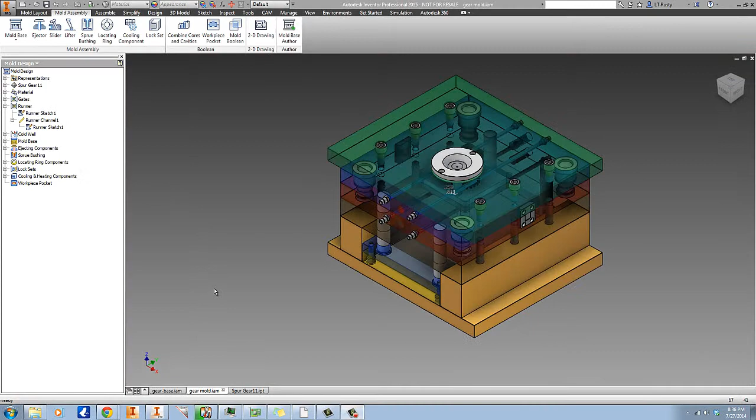Okay, final step here, which is simulation. Click back over here to the mold layout tab. You can see over here on the right we've got mold simulation.

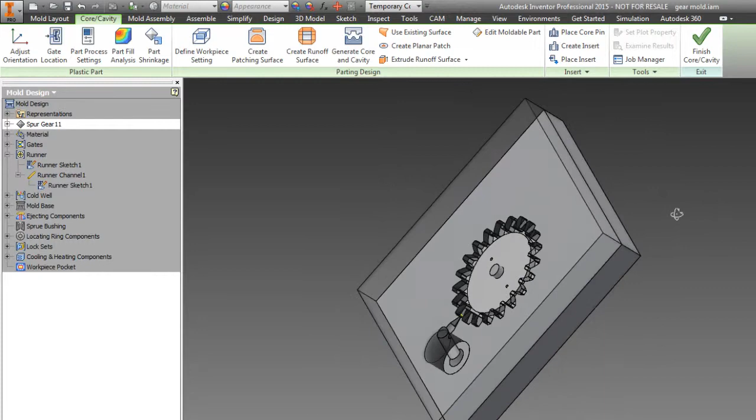Now you may have noticed when we were in the core and cavity section earlier you could do part fill analysis. Well, part fill analysis is cool, but it doesn't give you really complete results. It doesn't take into account the shape of your gate, the shape of your runners, sprue, anything. All it looks at is strictly just one point for your gate.

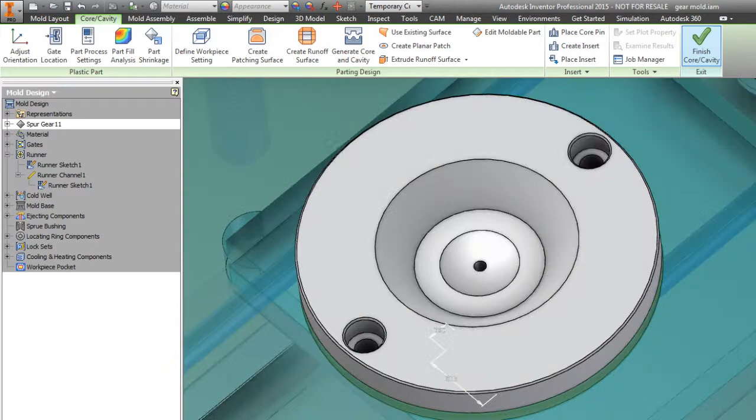And then just the part shape. Now you can use it to get some quick information and just a general rough idea of whether or not your part is going to perform the way you want. But I do run it a lot before I go to all the trouble of making the whole mold.

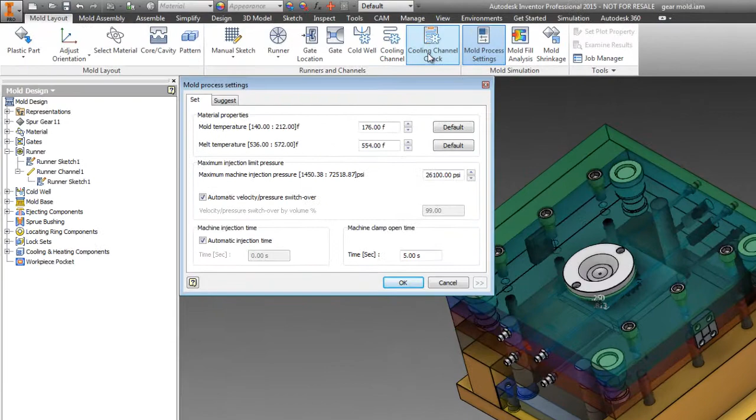But this one is a much better simulation. Now it is worth noting that this is a very stripped down version of Autodesk Simulation MoldFlow that's built into Inventor Pro.

It's not going to give you all of the same information, and it's certainly not going to give you the same information density that you'll get out of Sim MoldFlow. But it also doesn't cost $80,000, so there's certain trade-offs that you have to make there.

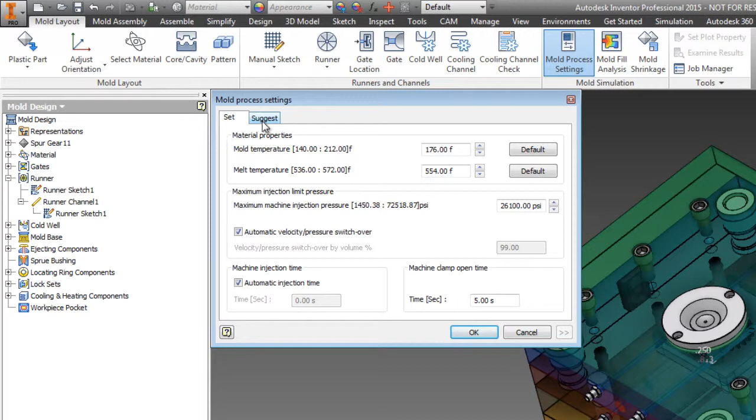Start off with mold process settings. We'll click on that, and I'm going to go ahead and click on the Suggest tab because I can throw numbers in here all day long, but Inventor will figure out a good starting baseline to work from for determining your process settings.

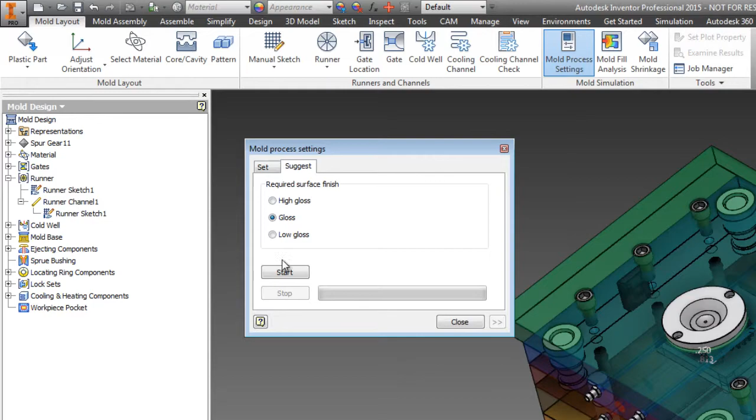And we can pick from 3 different types of finish here. Now, being a gear, this is probably not a cosmetic part, since we didn't try to make it fancy. This is probably just going to be an internal piece. So low gloss is going to be okay for the surface finish. And I'm going to go ahead and click Start here.

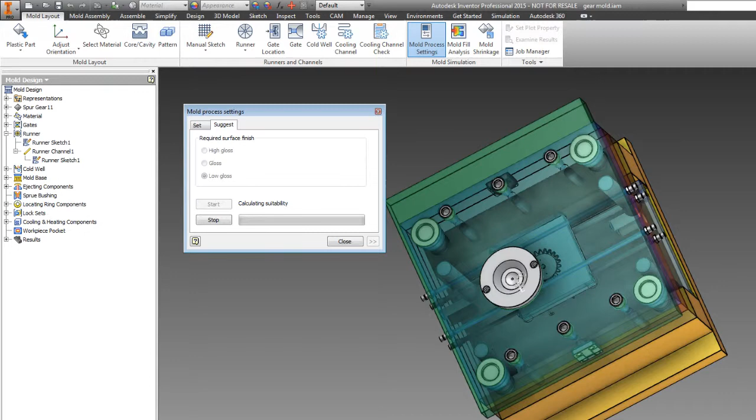And I'm going to actually pause the video once the simulation is running, because you don't want to sit here and wait. So pause. Alright, and we're back. That took about 3 or 4 minutes in the end. The actual analysis was quick, but everything leading up to it took some time.

So it automatically brings up this window, which is kind of a summary of the results. And using this particular material that we used, which is a 6/6 nylon, 33% glass fill, it recommends that we start off with a mold temperature of 180 degrees, a melt temperature of 556 degrees, and yes, this is all in Fahrenheit.

I still don't think in metric. For me, degrees are always going to be Fahrenheit. Injection time will be 0.75 seconds.

Now you notice over here it shows us the little 7 for the recycling, and that's of course other plastics, which your recycling centers all hate. It says environmental impact is only 3 out of 5, so less energy to mold this than some.

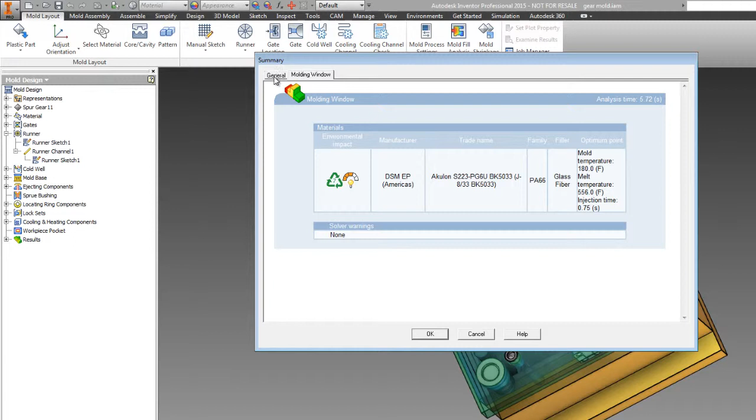And you click over here to the General tab, and it says, okay, the imported model is thick and chunky and appropriate for 3D analysis.

Analysis resolution is just going to be default. We're not going to do a real high density analysis here. The max machine injection pressure that this is going to need is going to be somewhere around 26,107 for the injection pressure, sorry. So we'll go ahead and hit OK.

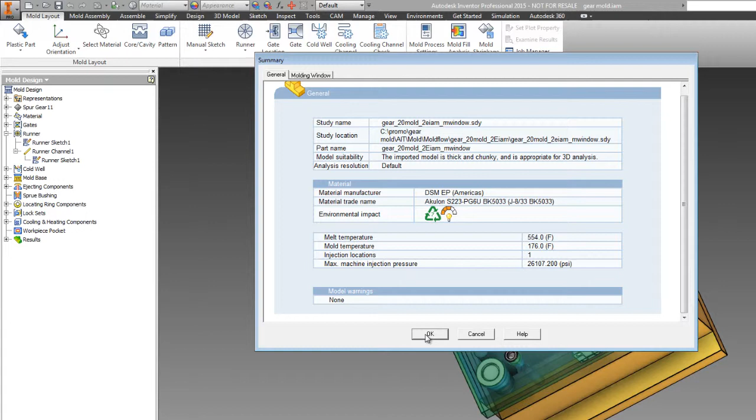And now when we click back on mold process settings, you'll see that the recommended settings have been carried over in here. So we'll hit OK again.

We'll hit mold, actually before we do that, and check on mold shrinkage here. Now, of course, shrinkage is really an extremely esoteric art.

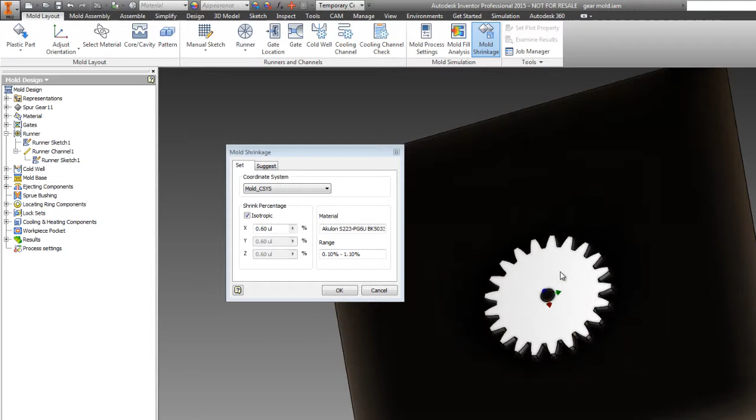Manufacturers don't like to publish real accurate shrinkage numbers. They'll give you kind of a range because they don't want you to hold them to it if there's a slight formulation change or anything. So in this case, for this Akulon, the range is 0.1% to 1.1% shrinkage, and Inventor kind of takes a median on that of 0.6%.

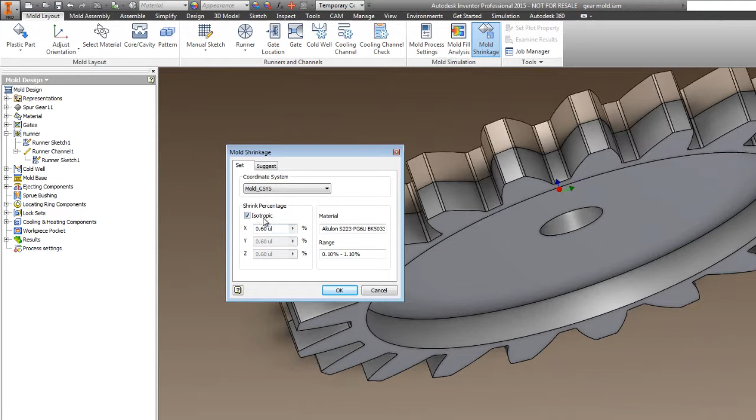If we uncheck isotropic here, then we can specify our own shrinkage in all 3 dimensions. And Inventor again can give us an estimated, a suggested shrinkage to use, based on end of fill pressure or absolute pressure or whatever. But I'm gonna just stick with the default isotropic 0.6%.

So, oh, no, I wanted to cancel that and not edit it. So, okay, mold fill analysis. Go ahead and hit that, and we're going to hit start again. And then again, I'm going to pause because this will take a few minutes. It won't take very long, but I've got an i7 4770K and 16 gigs of RAM, and this will still take a good solid couple of minutes to run. So, pause.

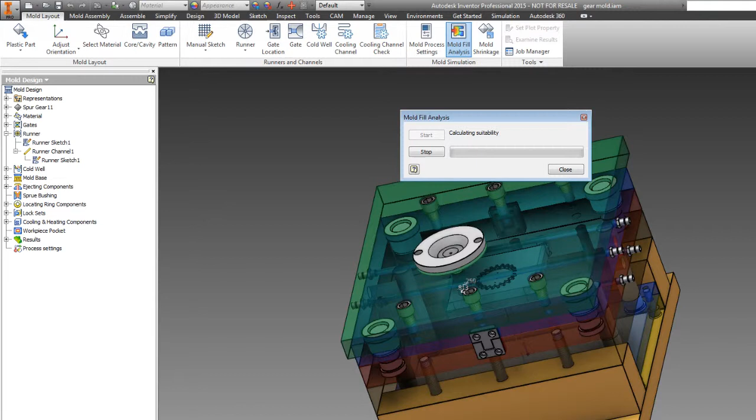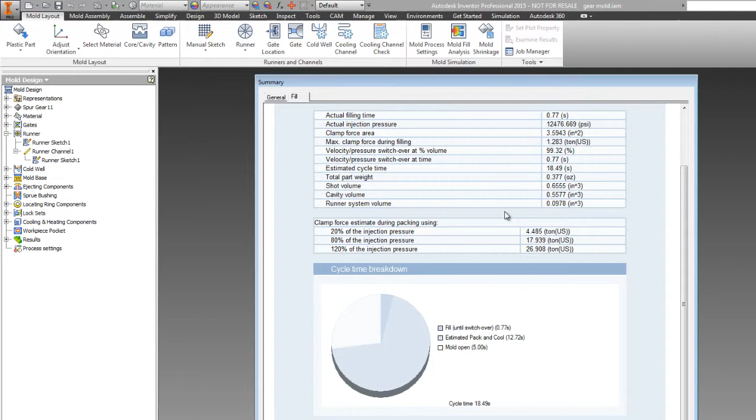Alright, and we're back. And you can see here, our part can be filled easily, but part quality may be unacceptable. And we're going to take a look at the results here in a minute and see where we can expect it to go wrong. But you can see there's quite a lot of information here about the process. Shot size, cavity volume, etc., clamping force, and you can mess around with that a little bit.

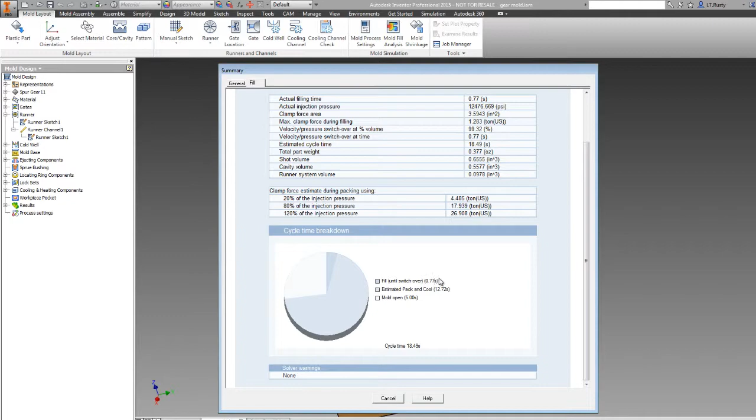Our cycle time, this is based on a mold open time of 5 seconds. Our fill should be 0.77 seconds. Estimated pack and cool time, 12.72 seconds. And if we have 5 seconds open for ejection, then total of 18.49 seconds. So go ahead and close that. And we're going to take a look at results. You see over here in the browser bar.

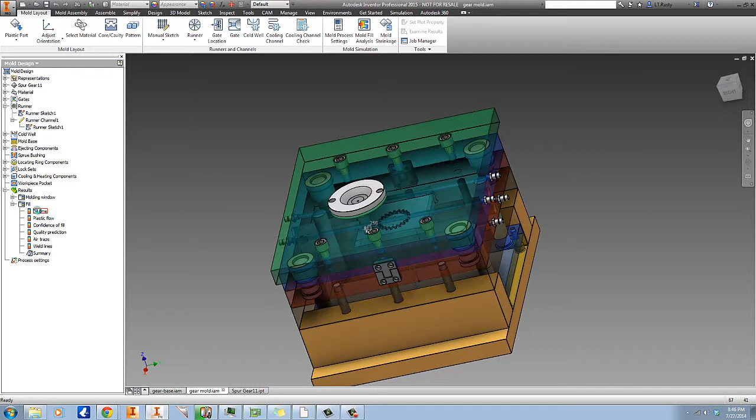I'm going to look at the fill results. First thing, we're going to look at fill time. You can see the runner system, the cold well, which we never did go back and adjust the diameter on that, did we? We've got our sprue and our part. You can see over here a little graph for the fill time. Now over here in tools, we'll hit animate results, and this will give us a neat little animated display of the filling process.

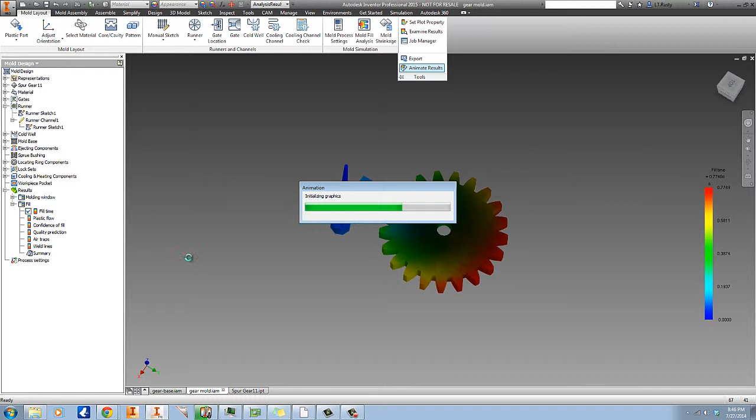And it takes it a minute to calculate this. This is really some pretty heavy duty calculations it's having to do here. So we'll set that on a loop. And view is a little bit dark here, so we'll go over to the view tab, and we need to turn off the shadows. I've got ambient shadows on, and there we go. Now that makes everything look a little bit brighter.

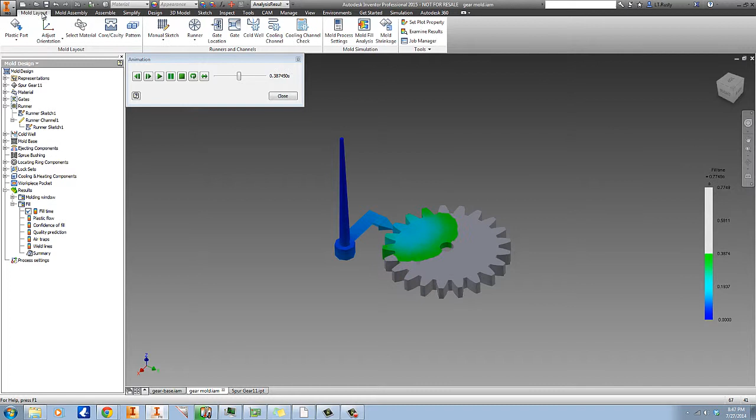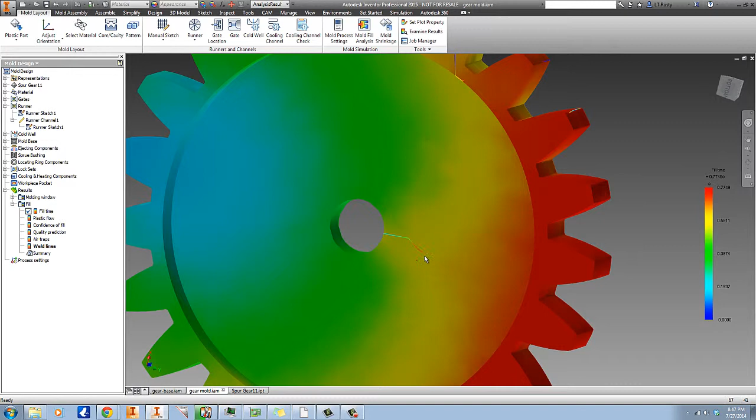And you can see this is the path by which the plastic is going to flow through this mold. You can see right here, it looks like that's where we're going to have a weld line. And in fact, you can even overlay the weld lines there, and yeah, right, exactly there. You can see where it's going to predict that we have weld lines, where the melt fronts are going to come together. Confidence of fill, high confidence of filling the whole part.

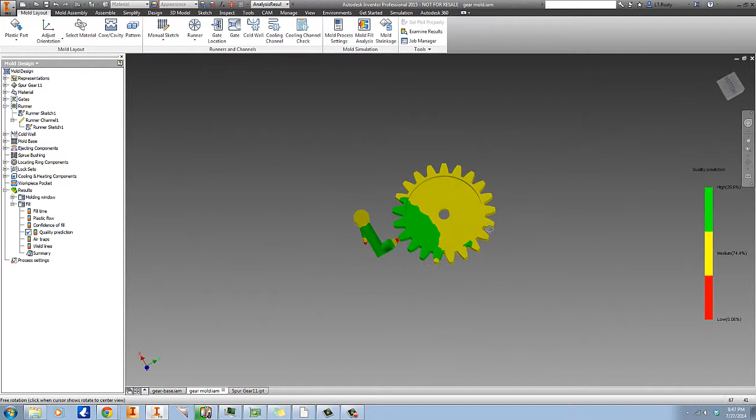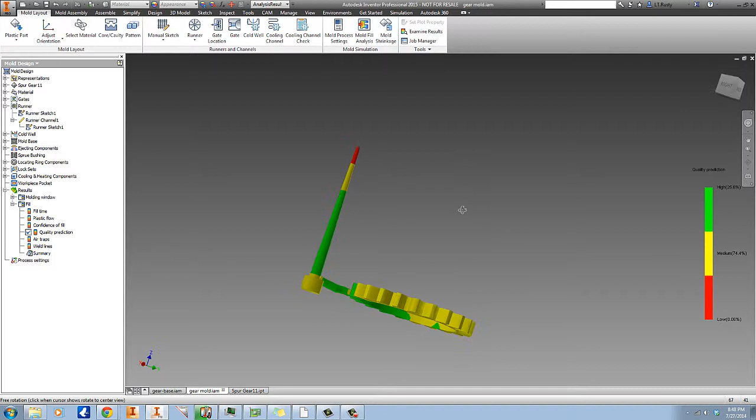Quality prediction though, yeah, and that's because we've got a very chunky part here with a lot of glass fill, and so it's going to have a little bit of a rough time getting us a good quality out here. And we can adjust the material to have something with a higher melt flow rate, or well, probably not glass filled nylon ideally, but we can adjust that. But this is a good little view here to see what we're going to look at.

So there you go. We have now spent almost exactly 1 hour and gone from digital prototyping all the way through mold design and even on into some very basic MoldFlow analysis simulation, all in just barely an hour.